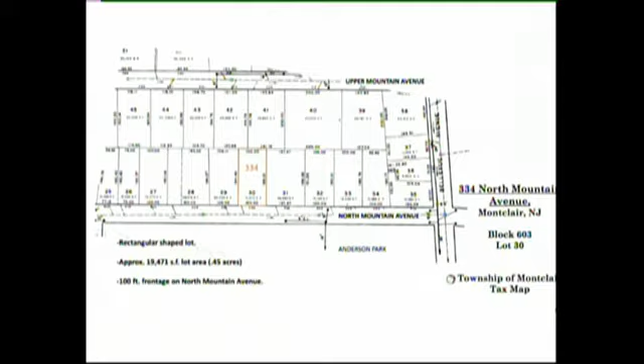The second slide is from the Township of Montclair tax maps, and I've highlighted the property in orange. You can see it's a rectangular shaped lot, 100 feet by approximately 195 feet in depth. It's almost half an acre, 19,471 square feet in size. It's similar to the other properties in the neighborhood. Some are slightly larger, but many of the lots are similar in size to this lot.

Next slide, number 3, is the zoning map. As you can see, the property is in the R1 single-family zone, so everything with that same color is in the R1 zone. Directly behind it along Upper Mountain Avenue is the RO zone. You can see a dark green line that separates this property and several of the surrounding properties from the area behind it and also to the south of it, and that's a steep slope zone. So this property is not within the designated steep slope zone that Montclair has established.

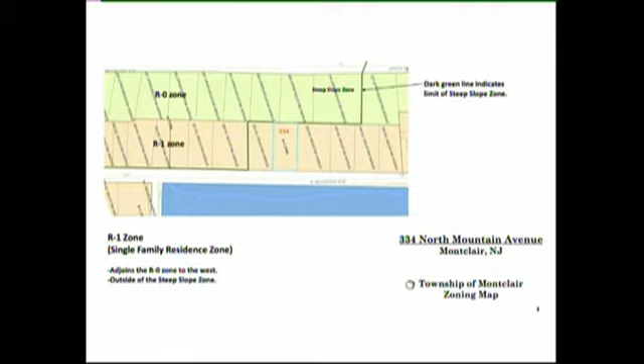Slide number 4 is the existing survey map of the property. The image on the left is the survey map prepared by Pronesti surveyors, colored for better visibility. You can see the existing footprint of the house on the property, the existing circular drive in the front of the property. The top right is a photograph of the house currently on the property. You can see that's an existing 1.5-story house, constructed in 1955 according to the Montclair tax records.

That house is wider than the house that's proposed. It's 83.9 feet wide, or 83.9% of the lot width. As I stated, that house has a circular drive. The applicants are proposing to keep the circular drive, but to make it nicer. It also has one garage door that's right on the front of the house facing North Mountain Avenue. As most of you are familiar with these properties, they slope from the rear to the front, or from the west side to the east side down to North Mountain Avenue.

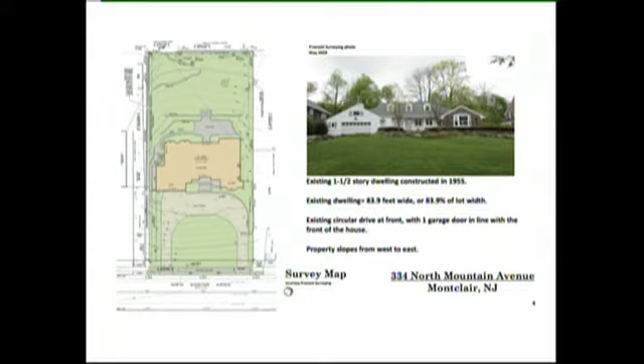Next slide, number 5, is the proposed site plan, indicating the proposed house. We're proposing a new 2.5-story single-family house with a detached garage. Many of the properties in this neighborhood have detached garages in the rear of the property, which is fairly traditional, and the applicants had asked for that rather than having a garage at the front with doors facing or closer to the street.

So the proposal is to maintain the existing circular drive at the front of the dwelling, but with much improved aesthetics. There'll be pavers to break up the center of the circular drive, and a decorative wall at the front portion of the center of that circular drive.

Also important, if you've driven through this neighborhood, North Mountain gets pretty busy with cars parking on both sides of the street from people using Anderson Park. So it's difficult for many of the people who live on this west side of North Mountain to back out of their driveways, and difficult for sight visibility because of the cars parking on the street from people visiting or using the park. The park is beautiful and very popular.

Everything with the application conforms to zoning requirements except for one thing, and that's the proposed porte cochere, which is to be open, on the north side of the house. The house is only 64.83 feet wide, or 64.83% of the lot width, but the proposed porte cochere is 13.25 feet wide, which requires the variance because the most we're allowed to have on this property is 65% of the lot width.

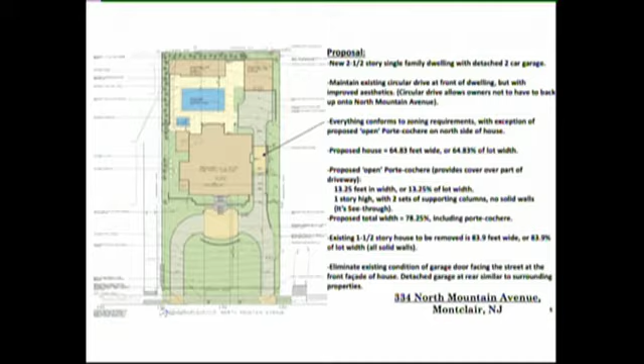Slide number 6 is the landscape plan. The applicants retained Tapestry Landscape Architecture, a great landscape architecture firm from Haskell. We discussed with them the use of native plants, so they're proposing the majority, if not all, of the planting for the landscape plan to be native. However, the south side, north side, and rear west side of the property, beginning with the front of the house, are to be surrounded by evergreen plantings, so this will be fairly screened from the rear and both north and south sides of the property.

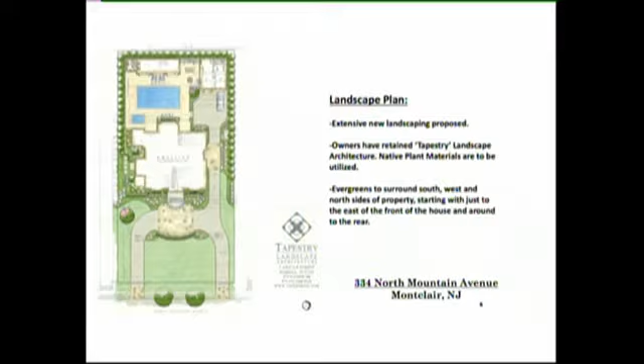This meaning the porte cochere you're referring to? Well, yes, the porte cochere will also be screened on the north side of the property, with evergreen plantings along the property line.

Slide number 7 is the front elevation, or east elevation, of the house. As stated, it's proposed to be a fairly traditional style house—a 2.5-story classical design, center hall, colonial single-family house. It'll have wood clapboard siding, and we're proposing slate roof shingles. On this slide, you can clearly see the 1-story see-through, open porte cochere on the right, north side of the house. The point is to provide covering over a small portion of the driveway, enough to cover a car. The porte cochere is to be supported by two sets of columns.

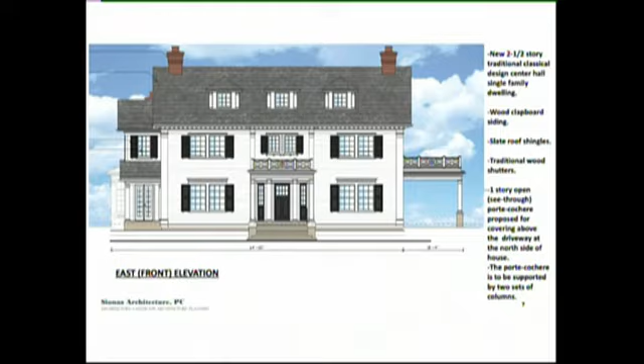The next slide, number 8, shows all 4 exterior elevations of the house. The top image is the front elevation, the top right is the north elevation, where you can see the porte cochere is set back 23 feet from the front line of the house, the front entryway, and the porte cochere itself is 22 feet wide—enough for a car to pull under and provide protection from the elements. The other two views are the rear elevation, which is the west, and the south elevation, which is the left side of the house.

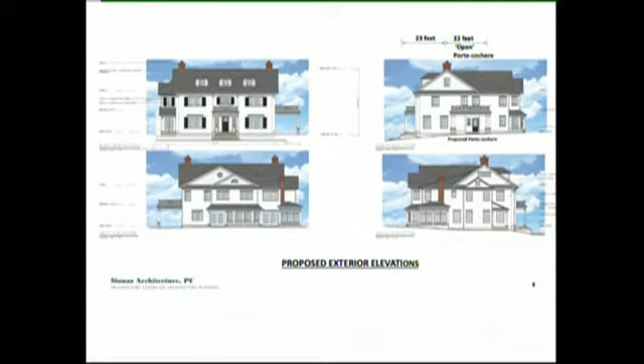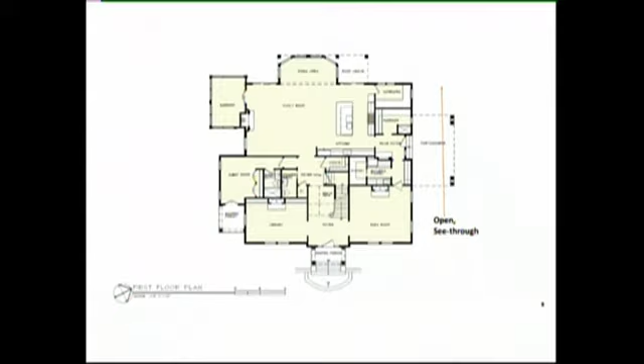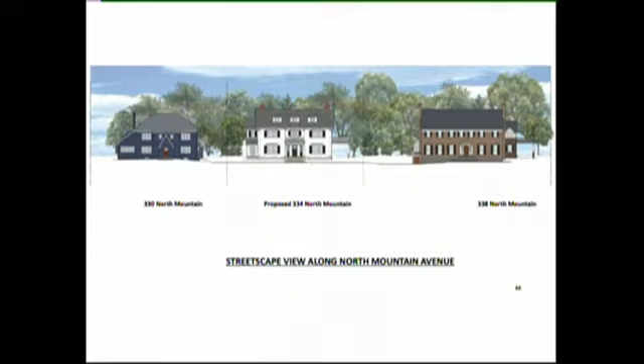The next slide, number 11, is a streetscape rendering. We took a 3D image of the proposed house and inserted it into a photograph showing the two surrounding properties, then worked with a rendering company to incorporate it into the photograph. This again shows how the proposed house fits in amongst its neighbors. It shows the porte cochere on the right, or north side, of the house, set back from the front line of the house, and you can also see how it's open and not a solid structure.

So then I'll discuss zoning. The application conforms with everything in the zoning ordinance except one requirement - we're seeking a variance for the maximum permitted building width, which is 65%.

With the porte cochere, as I stated, we will have a building width defined as 78.25% of the lot width, exceeding the allowable building width by 13.25%. Since this is a 100-foot wide lot, the porte cochere is 13.25 feet wide.

The purpose is strictly to provide a covering over the proposed driveway. There's currently no driveway leading to the back of the property because the house is wider - there's only the front circular drive and garage. By pulling the house in width, we're allowing for a driveway to go to the rear of the property to a new two-car garage.

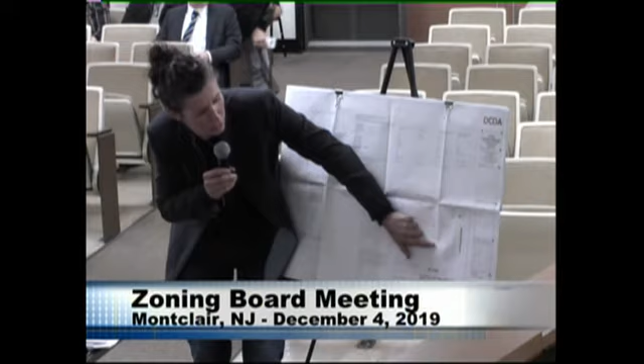And you're proposing some other changes to the front facade also, in addition to the porch, is that correct? Correct, absolutely.

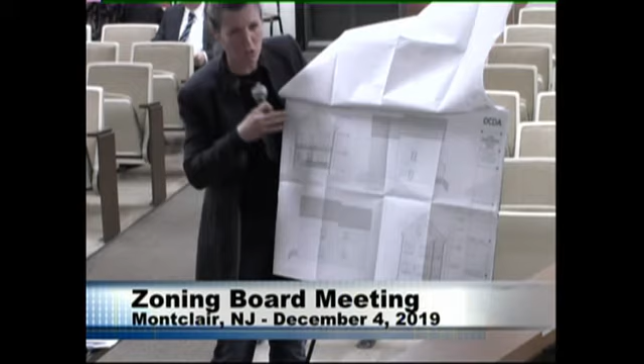If we go to the third page of the drawings I submitted, top left corner, we have the front porch. We have windows, we have a little bit more dimension in the front facade of the property, and it's definitely more appealing. However, the setbacks will remain the same. We are not pushing the property further closer to the street.

All right, you want to talk about the addition to the rear? So when we go back to the first page, this here is the existing structure that's there. I would like to put the addition, which would include a dining room, a kitchen, and a family room. To do that, we can keep a 6 feet setback on the left side. On the right side, I would like to continue the addition with the existing footprint of the property, which is at 3'7" setback.

So the addition would also continue the 3'7" setback of the existing structure? Correct. You would not intrude any further into the side yard than the existing building? Correct.

And did you indicate what's the purpose of the addition, what rooms are you adding? So this part here is the first floor, and that's the existing structure where we are putting 2 bedrooms and a den. In the addition, I would like to add a kitchen, a small dining room, very small, 9 by 9, and a family room.